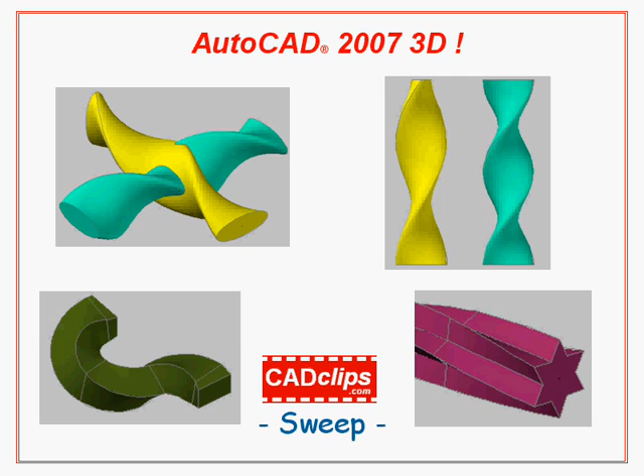In this lesson, we're going to talk about the new sweep command. The sweep command is nothing new, but the difference is it has a bit of a different interface, and you don't have to align the profile you're sweeping with the path. That part has improved, which makes teaching 3D so much easier because you're having to use your UCS a lot less now. It's become a lot easier and more intuitive.

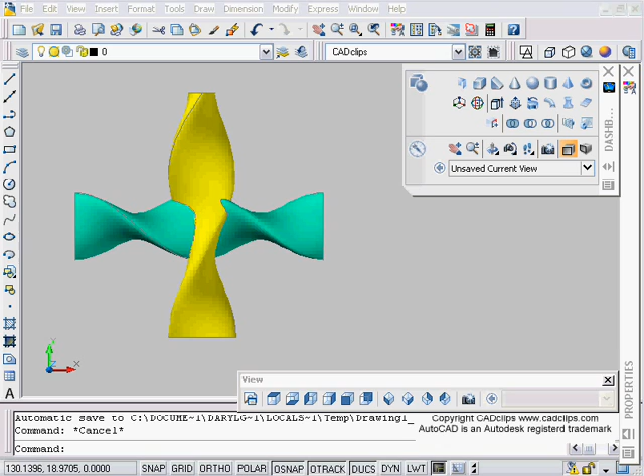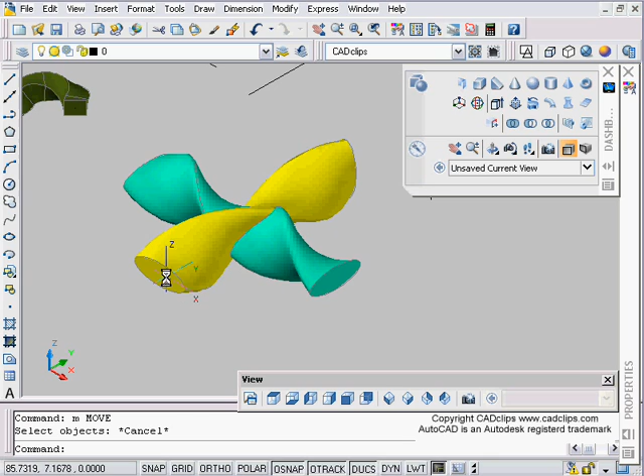The sweep command is really a no-brainer here. All you really have to do—I've got a bit of a boneyard you can see here. I've unioned these together with my Boolean operations, but this is an ellipse that is swept along a straight axis and given a twist, which makes sense, right? Here's an ellipse, and the line that it was swept along.

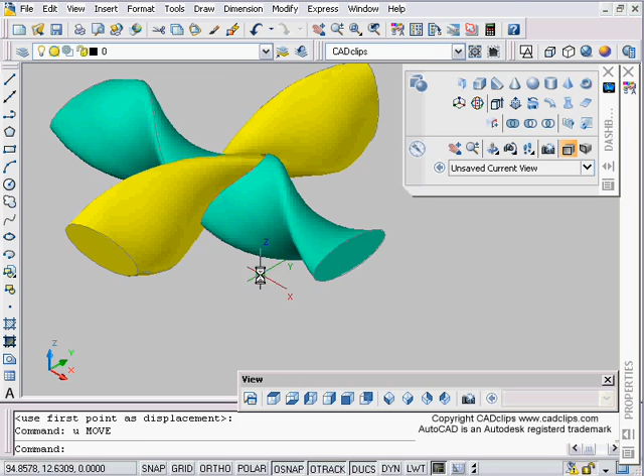Oh, the path has disappeared, or I left it. I think it's over here somewhere. This is an ellipse swept along a straight line with a twist—in fact, you cannot twist it 360 degrees. I'm noticing you have to go 359.9 degrees. This one is an ellipse swept along a straight line that is only twisted by 270 degrees, rather than all the way around like this one, which is near 360.

I've taken these two and just kind of unioned them together, just to show you.

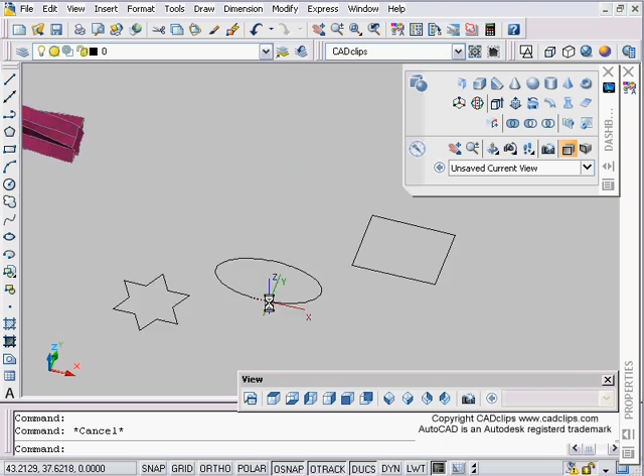Here's another example before we get started, where I've taken a shape like a star, just a polyline. Then I've taken another polyline that has been fit curved, and I take that star and sweep it around there. In this case, I also gave it a slight twist, I think a 30-degree twist from start to end. So from start to finish it'll twist that amount. Same type of thing over here.

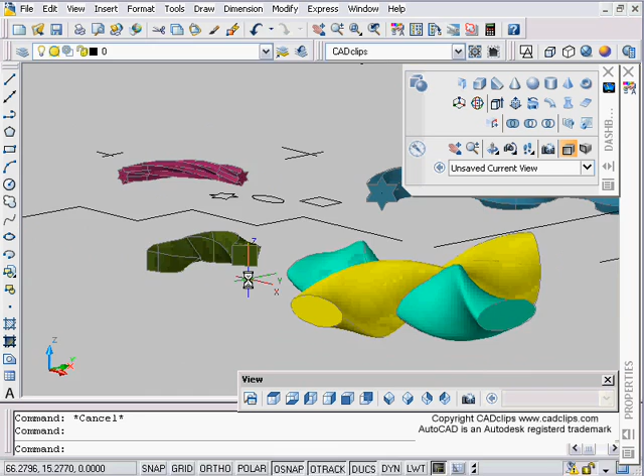Here's a rectangle, and it looks like the path—this is an interesting one because the path of this is actually just a 2D line. Maybe it's still there. Let's move it away. There it is. Okay, that's just a 2D line.

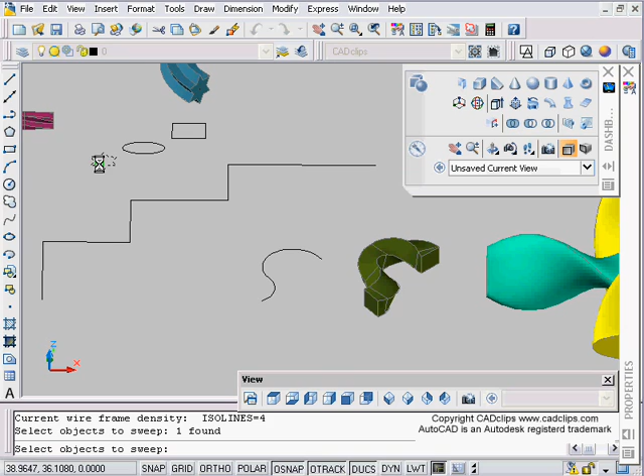All you do is take an object—we'll do it here—sweep up here on my dashboard. Select the objects to sweep, it says this. Enter, and then we get some options. I can say, okay, first thing I want to do is specify the base point. It's going to take the centroid, but I'm going to say B for base point, and hover over here to find that intersection, click by using my object tracking.

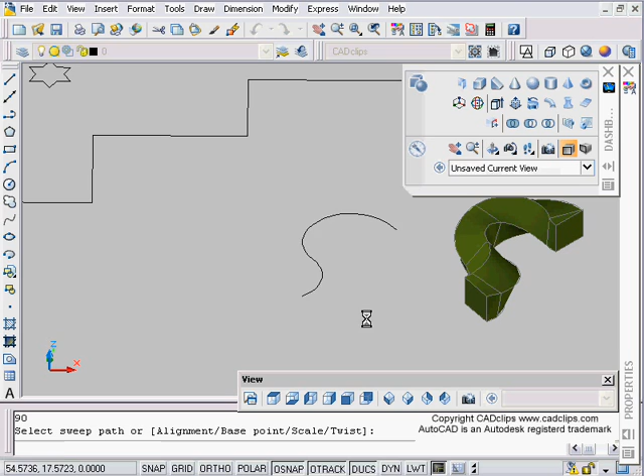Then it's going to ask for the sweep path, and I'm going to say twist before I pick my path. It's going to ask me the angle, and I'll say an angle of 90 degrees. Then finally I'm going to pick the path, and wait for a minute—it's going to generate that solid object for you.

In other cases, I've clicked on here and gone to my properties and changed the color or something like that. Then you end up shift-middle-mouse-button with that shape there, and that's really it.

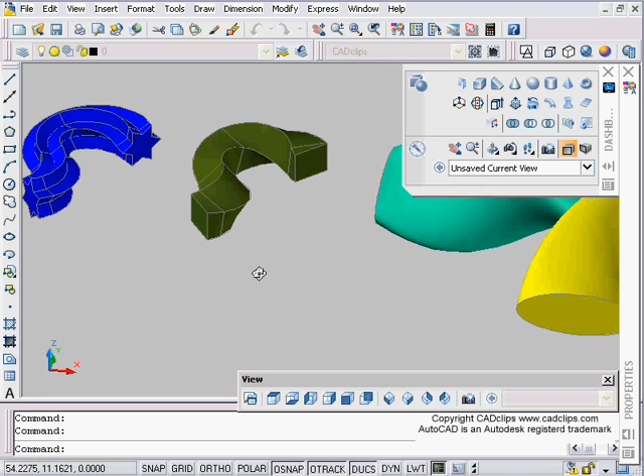You can provide all those options as you saw in the command line, or you can not twist it, or select a regular polyline. I'm going to do it again—say sweep, pick this as my object, enter. I'm going to say no twist or anything, just go straight to here and do it, and that's it. It's that easy. Okay, I'm going to undo that.

Now what I'm going to do is go fillet and say P for polyline, then give a radius. Select the polyline and fillet that, however I want. Then I can do another sweep, this to this, enter.

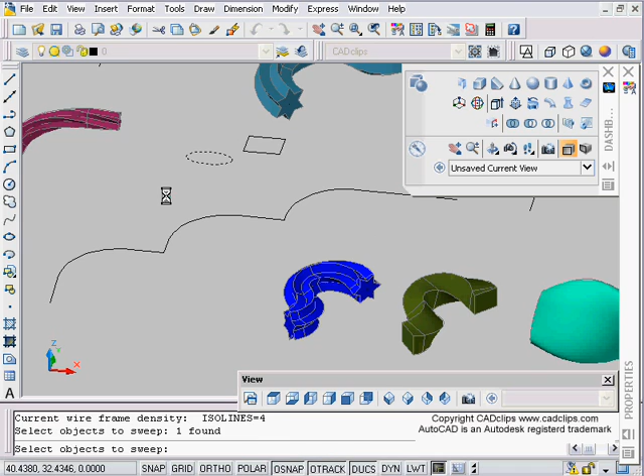Oh, you can pick more than one object—that's what I did. This, enter, and then this, and then it'll do that sweep, and then go have a look and do your twist. There's really not that much to it.

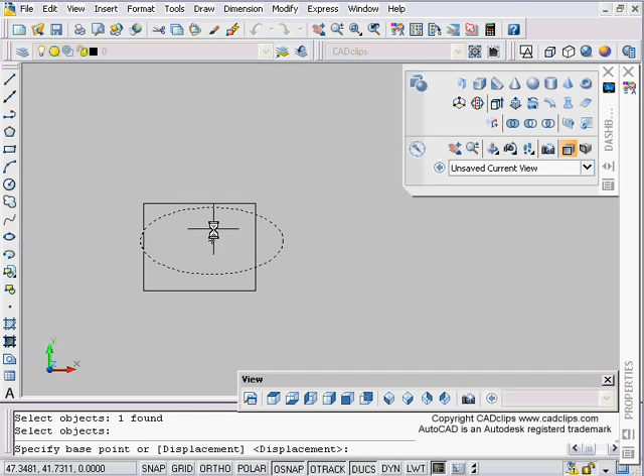The other thing is you can pick more than one object. What would happen if I move this to be here? Let's go back to my top view so I can see what I'm doing here. Let's take this and move it from the center of there to, using my beautiful object tracking, the center of there. And then let's even take this and bump it out a bit.

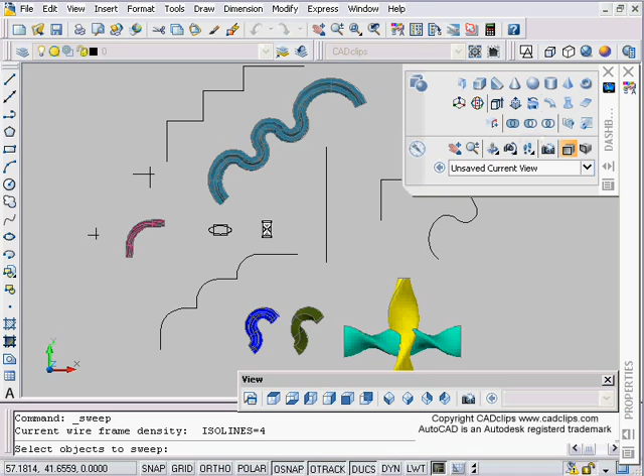See what happens? We can do this from 3D or we can do it from 2D, it doesn't matter. Let's go back to our 2D view. I'm going to say sweep, and pick more than one object, enter, and go straight, pick the path. It's going to take that shape and sweep it around there.

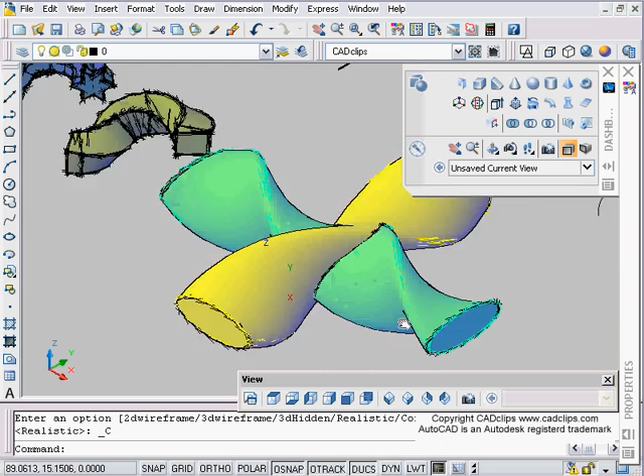And then we have that shape. I can go look at this in different viewpoints if I want, using my nice jitter. Got the jitters. And change the color and add materials, etc., all by your properties, and then do a bit of work on material.

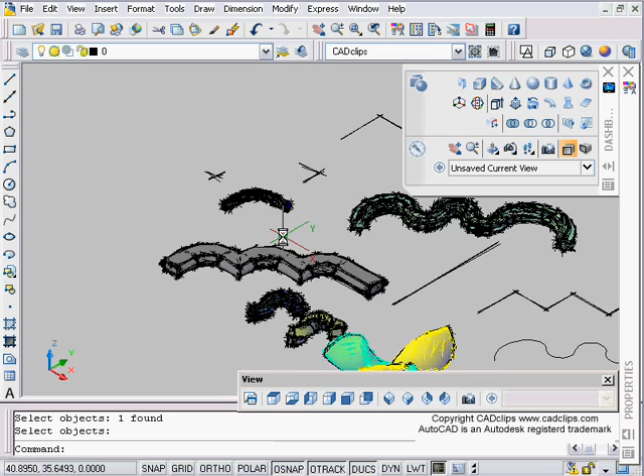So you can pick more than one object to do the sweep. Let's just have a last look at our sweep command in particular, and it doesn't matter. I'm just going to draw an object here so I can start the command. I'm going to start my sweep. Select objects, select one or more objects and then enter.

So twist will give you a twist, and it has to be less than 360 degrees, I'm discovering. Scale, you can simply scale the object. Base point, you can pick the base point. By default, it's going to take the centroid of the combined objects.

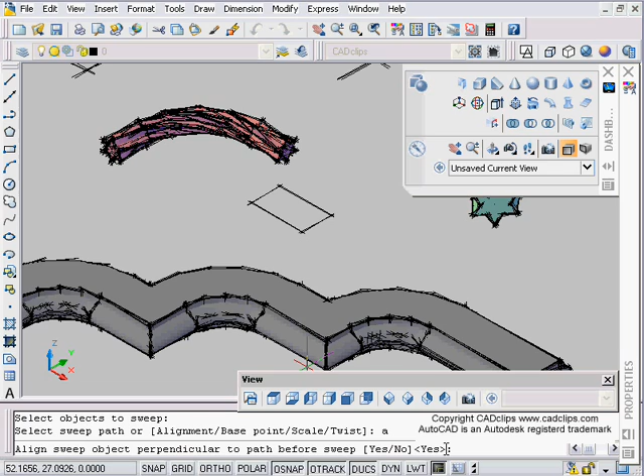And then the last one here is alignment. If I say A for alignment, you have the choice of aligning the sweep object perpendicular to the path. So that's our big treat there. By default, the answer is yes, which we would normally do. If you say no, what happens is it won't realign it, and it'll sweep it in their two relative positions. So you can choose to align it, which is the big bonus. That's probably the new part.

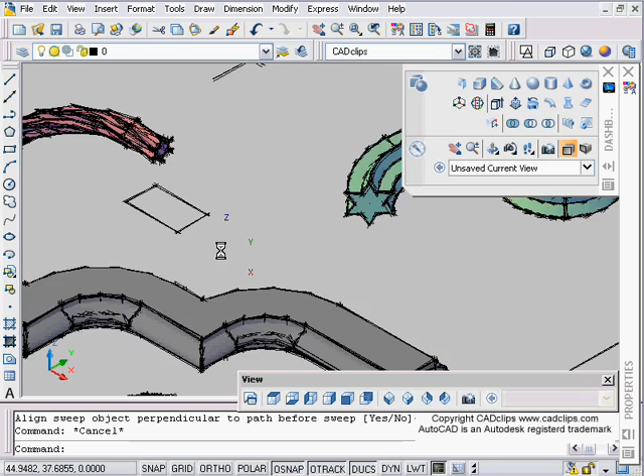So your profile can be laying down, and your path can also be laying down. They don't have to be in relative placement. Otherwise you can say no, and then it will take the object and leave them relative to one another and do the sweep that way. So you have that alignment choice that you can make.

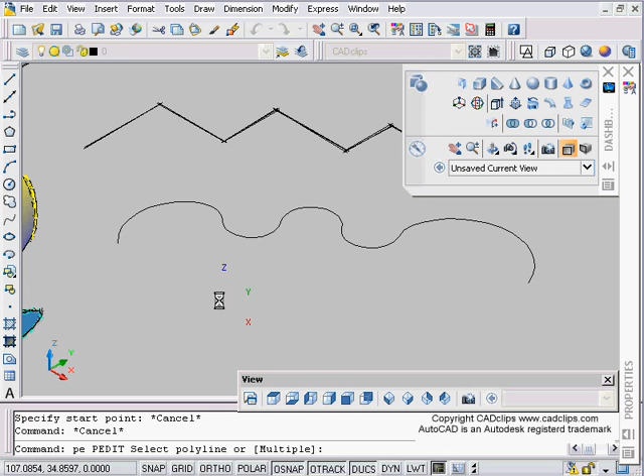And then the actual path that you do your sweep along, you can use a spline, a fit curve, or polyline. I think you can use a splined polyline. Let's just make sure. Let's go PE for polyline, edit, pick on this and say S for spline, enter. Because a spline we know is not the same as a fit curve. Let's try this out.

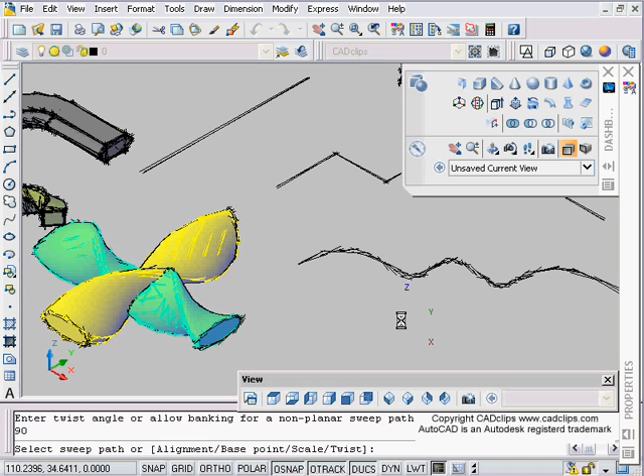I'm going to use my sweep. I'm going to pick this object, enter, and I'm going to set a twist of 90 degrees just for fun, and then I'm going to pick this point and it's unable to sweep objects. Now let's try it without a twist. This, enter, this. Okay, not working.

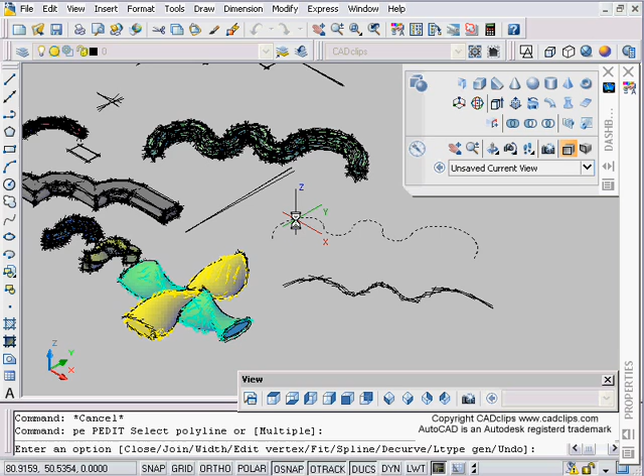Interesting. So let's do another sweep for this object, enter to this. Okay, that one works. Let's do PE for polyline, edit, and let's do fit curve, enter. And let's do a sweep of this, enter this. Undo, and I guess you can, so there you go. You can use a fit curved polyline but not a splined polyline.

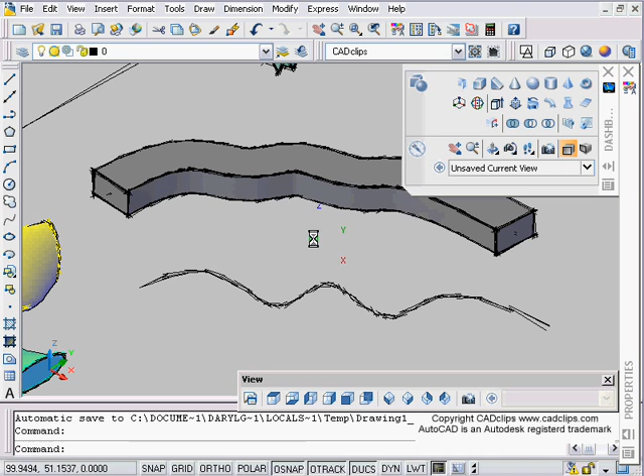Okay, what if we draw just a spline? Let's try this one more time to make sure. This, enter here. And oh, that time it worked, interestingly enough. So the thing is, you have to be careful if this object is too large and it starts to actually interfere with itself as it goes around the corners. That's where you'll end up with a problem. So that may be the problem with this, is that those curves are a little too drastic.

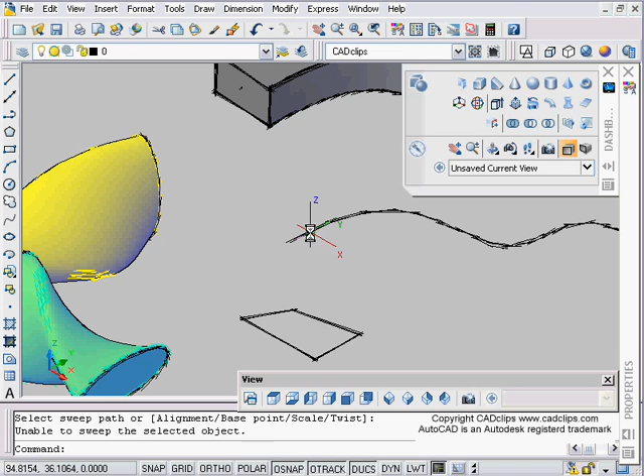Okay, what if we try this one more time and we pick our rectangle? Oh, rectangle's gone. We have to draw a new rectangle. And then I'm just going to draw a spline, and this doesn't even have to be a rectangle. We can do a loft or sweep this. Oh, okay, so could be interfering with itself. I might have to make that a bit smaller.

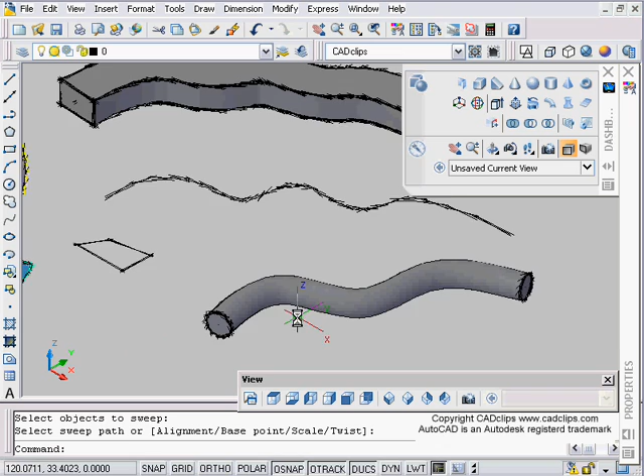And the last thing is, what if we just actually draw a spline instead? Okay, and we do it. Let's draw a circle just to make sure, and do our sweep. This, enter this, and there it is. And that's it. It's nothing too difficult. Try it out, experiment, get creative, start to use all of these tools we've been talking about.

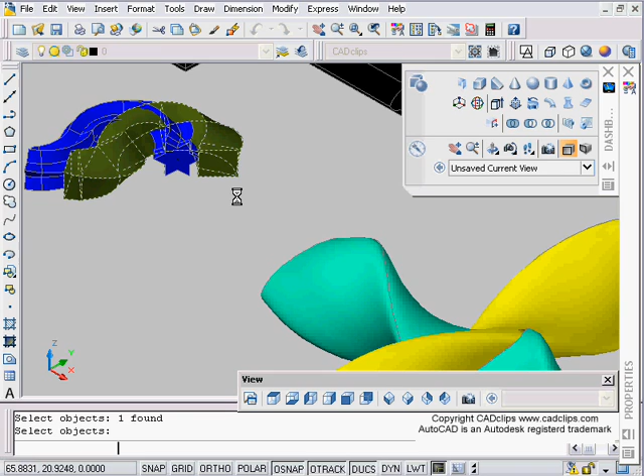Don't forget about our Boolean operations of intersect, subtract and union, which is where we can take these objects and start to blend them in with each other, and then maybe do a subtract from this, enter this, and then it'll actually remove from that. And of course, the more complicated the shape you have, the more difficult it's going to have it. But as you can clearly see, it does the Boolean operation there for you.

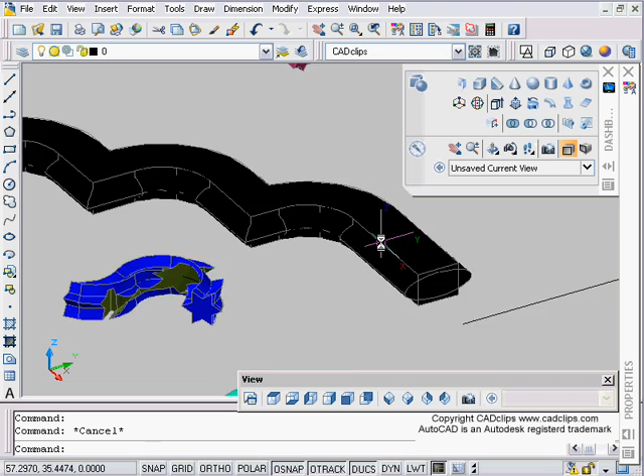So take these tools that we're using here, loft and sweep and all these tools, and combine them together to build your models.